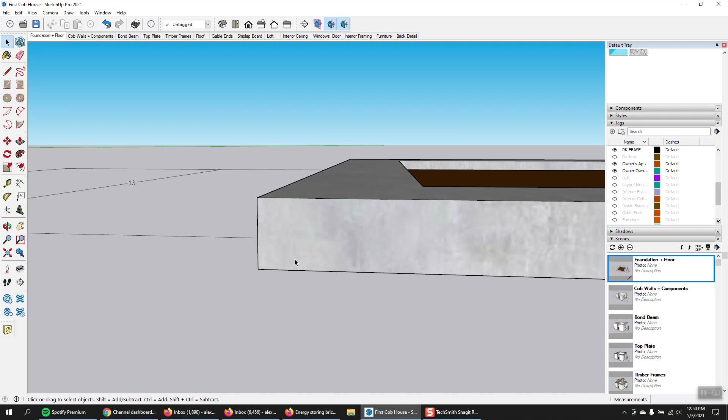So you'll see the foundation here, we're not actually going to be going beneath grade in this particular video. The below grade foundation has not been designed yet. It will be included later. So everything here is above ground.

And you'll see also the floors in here. The floor actually would be installed much later in the process. But basically the first thing is we want to put in the foundation, and then from there we go up and we build our cob walls.

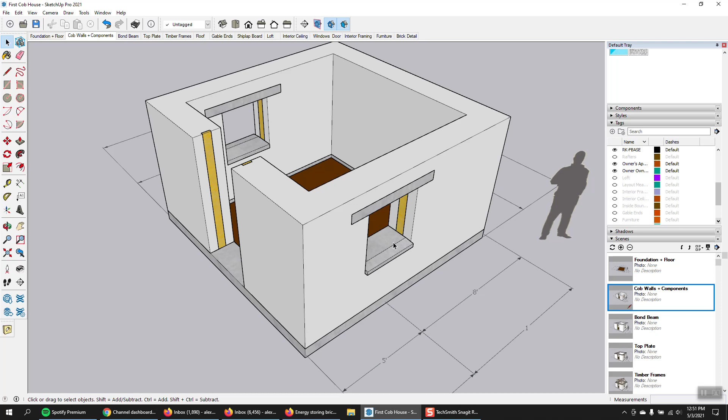So our cob walls here are 18 inches thick, and we have all of our window and door components, most importantly the sills and the lintels, and then we have the framing in here to attach our finished windows into. And I'll be making a video more on this framing later.

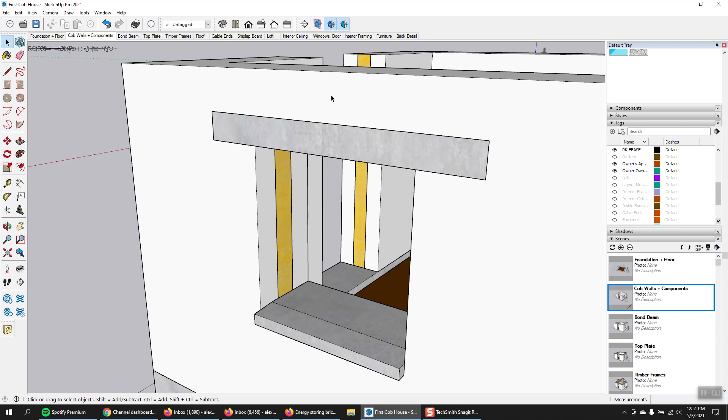Now the lintel, as you know, is a component that distributes the weight of the wall that's above this gap opening. And according to code, you would have the lintel extend a foot past the edge of the opening. So it's a foot over here and a foot over here.

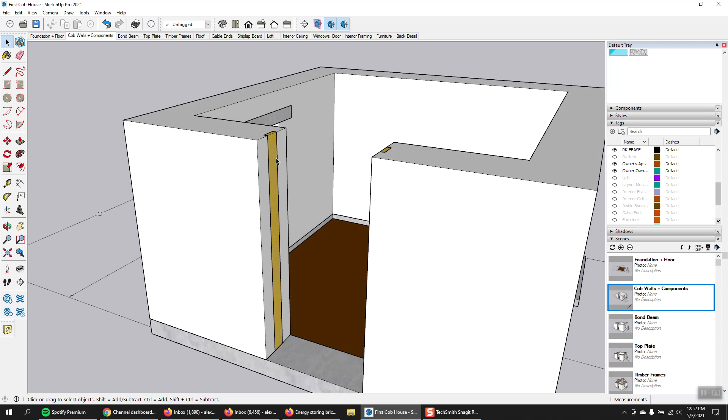And that is the same for doors, except in this case, we don't have a lintel above this door because our bond beam is going to go right up here.

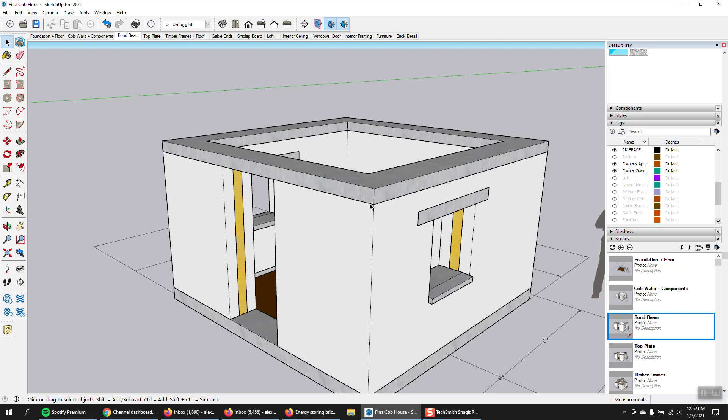So here we have the bond beam, which extends all the way around the top of the walls. And this bond beam actually replaces the need for a lintel in this particular case because these cob walls are only so high. Now from the bond beam, we want to attach what's called a top plate.

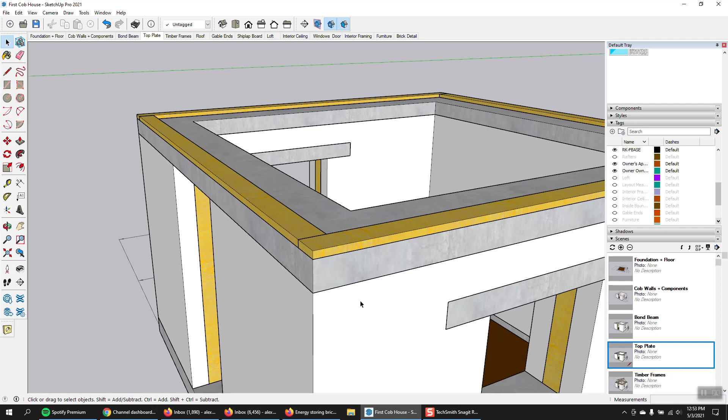And the top plate is bolted into the concrete of the bond beam, and I haven't shown the bolts here yet in the design, but you'll have J-bolts sticking up out of the concrete, and then a little washer and nut which tightens down and clamps this piece of lumber onto the bond beam. Now the important thing about the top plate is this is what's used to attach your roof to your walls.

So actually in this particular case I have some timber frames set up before we install the rafters. Now in this case these timber frames are more for sort of a decorative aesthetic purpose. The only real function they hold in this design is they hold up the roof ridge beam. Now, you don't need to do it this way though. So don't think you have to do it like this, at least.

I'm not going to get into all the roofing details here, but let's go ahead and add all the roof pieces, and I'll try to break it down a little bit for you.

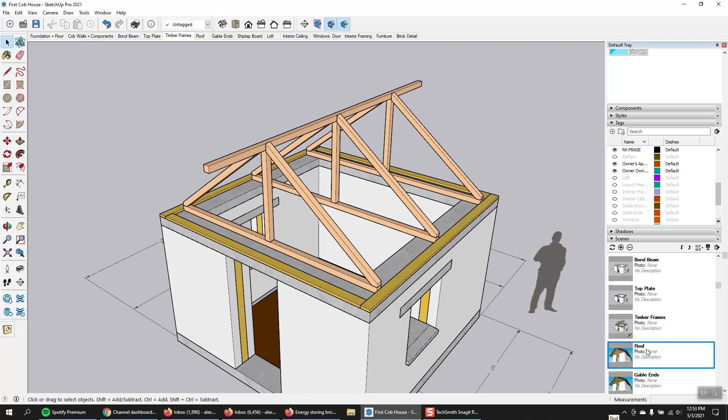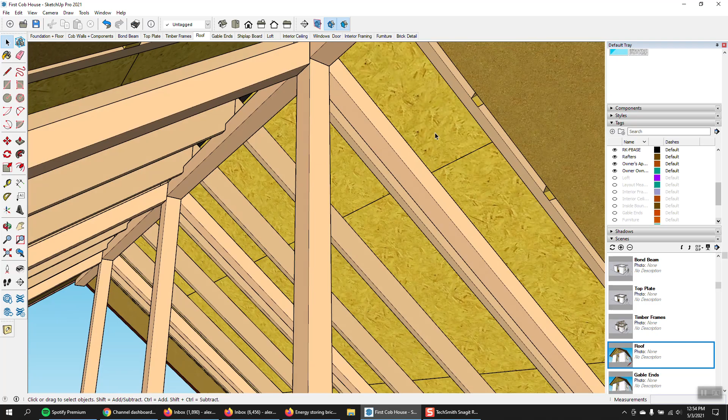So now we have the roof on, and as you'll see, we have the rafters, which are these, I think they're 2x8s or 2x6s, and they attach up at the peak and rest on top of that ridge beam. Okay, and then on top of the rafters we have this OSB plywood here, and then there's some roofing felt on top of that, etc.

I'm not going to go into all those details here, but basically it's the rafters, the OSB, the roofing felt, and then the finished roof tiles here.

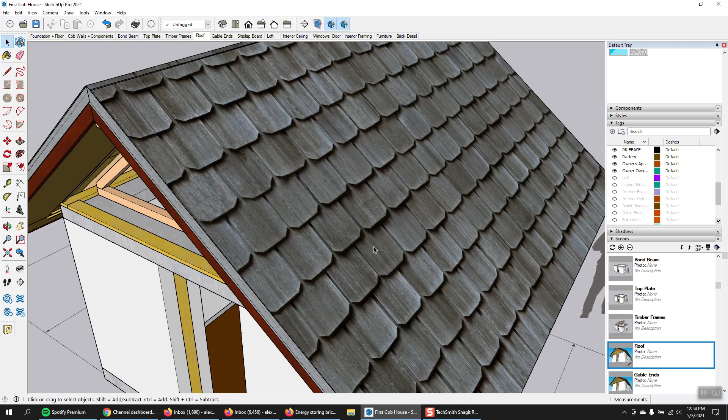And you'll also see I have this nice drip line all along the edges here, and some roofing details. And then the soffits.

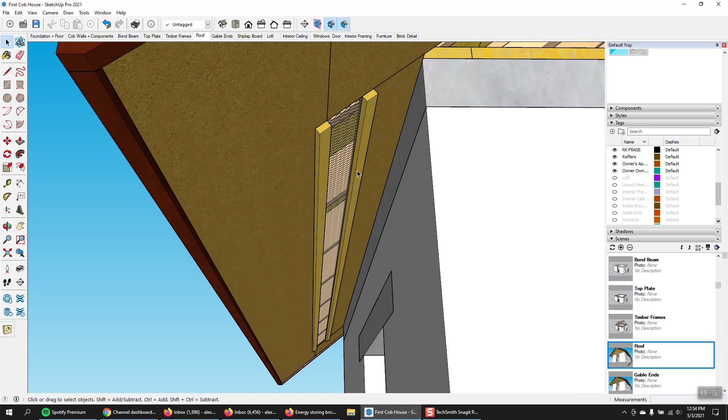The soffits are actually quite important, and I'll show you what those do. The soffit lets the air flow up through the roof, between the rafters up to the peak, and then out the top. There's actually a gap at the top here, and it's able to flow out.

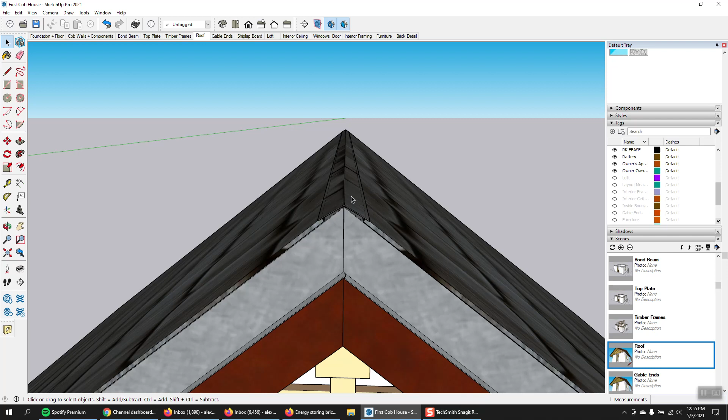Moving on here, we have the gable ends. We just plug up these ends here with some wood.

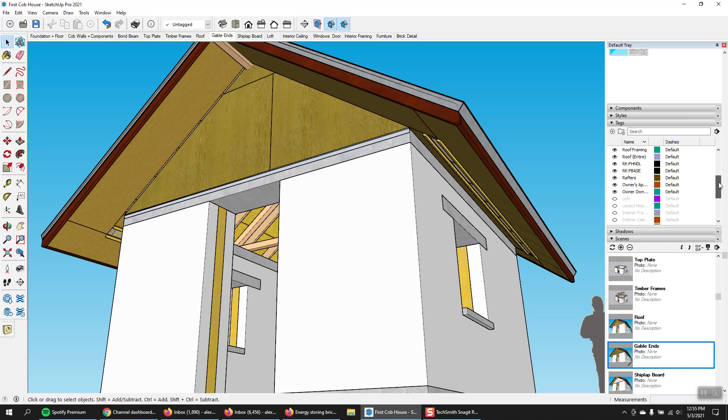Let's see if I can give you a better view here. All right, so we've basically just plugged up the ends by framing it out and putting plywood in between to cover it all up.

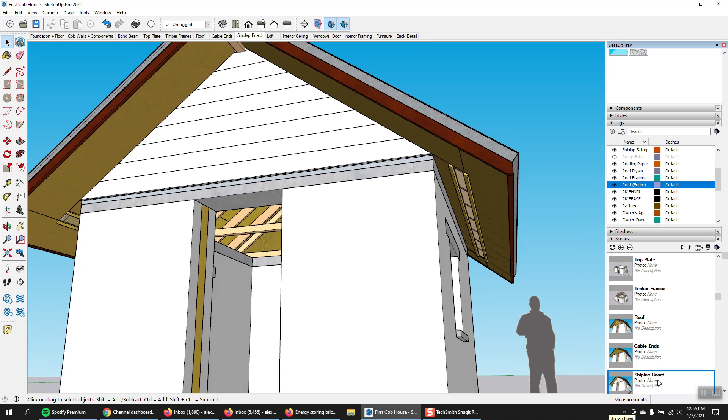All right, put some more detail, some shiplap on the exterior.

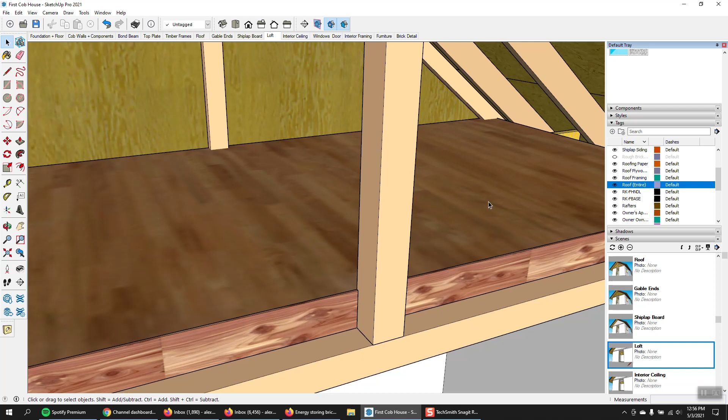Now we install a loft on the inside. This is just framed out, pretty simple actually. This is space for sleeping and increases the square footage of the interior usable space.

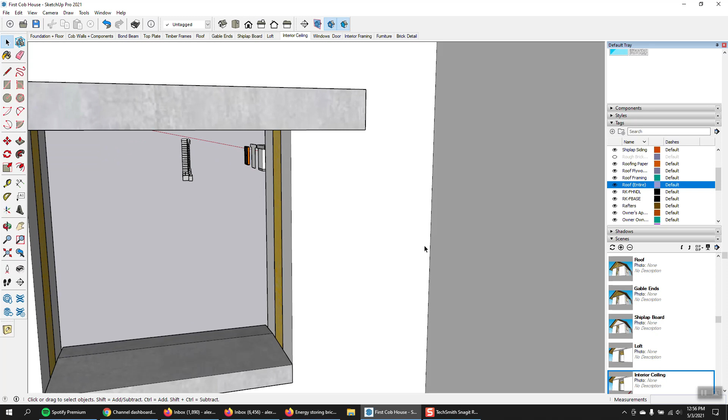Now the interior ceiling. Do all the finish work on the inside so it looks clean and nice. This is a plastered ceiling, and I've plastered the inside gable ends as well.

Now the next step is to install the windows and door. So I've got 2 windows, 1 door, and again these finished windows attach into those framings, which are embedded in the cob wall.

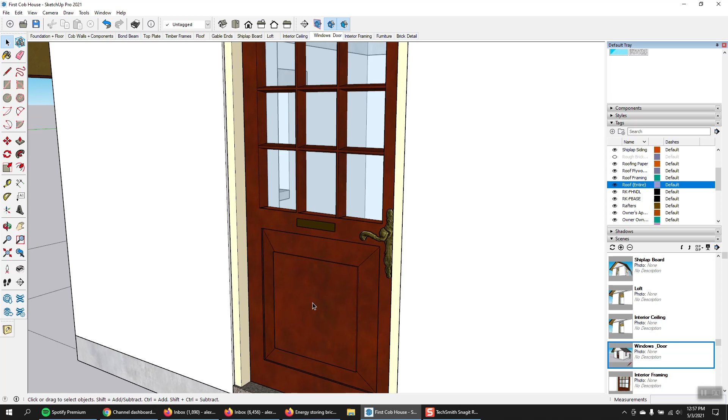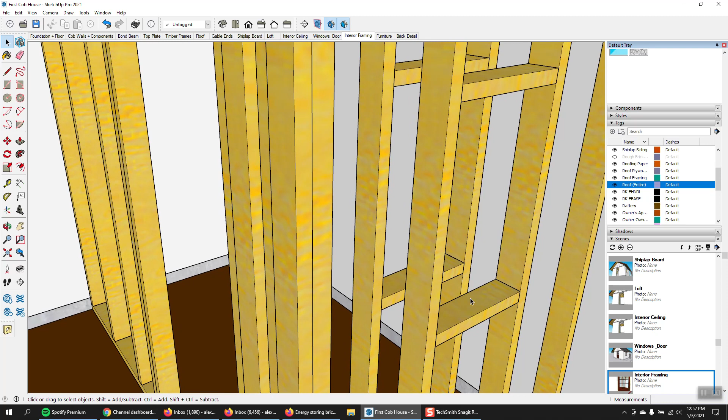Next step here is to install the interior framing. We have a couple little interior walls here separating the main room from the bathroom, and over here is a little utility opening which will be installed so we can get to electrical or plumbing that might be installed through this particular wall here.

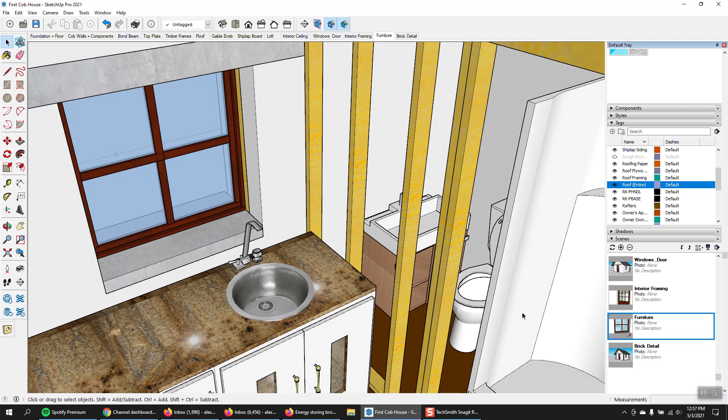And let's see, now if we add some furniture, you can kind of see the space and its functionality. So we have the kitchen here, little mini kitchen, got the bathroom in here, we actually have a shower, toilet and sink in there.

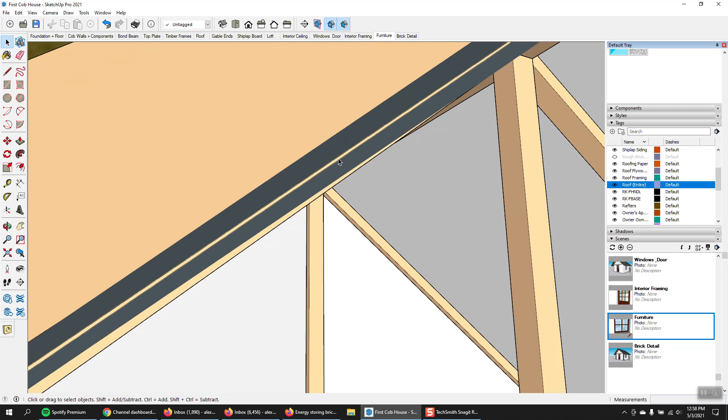And over here we have a little washer dryer. So there's enough room left. You could put your desk here to do your work and your bed up here in the loft. And that's basically the necessities.

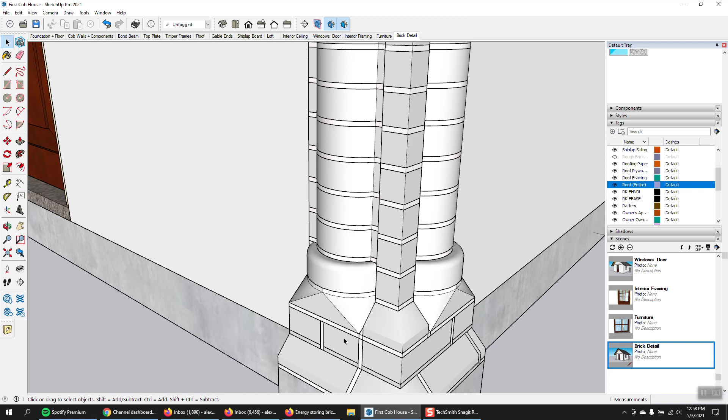So finishing up here, I've put some brick detailing on the exterior, and these are bricks that I make. They're architectural bricks, and you can do nice architectural brickwork with that for some aesthetic appeal. So I've put one of these columns on each corner.

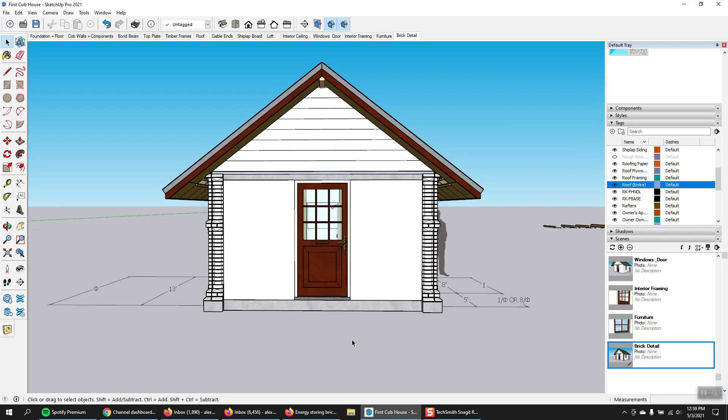And so that's that. That is a tiny cob house designed according to Fibonacci numbers, has nice proportions, it's functional, it's low cost, and it's going to be a great dwelling place.

Again, this is a tiny cob house that I'll be building as the first structure on my piece of property and using it as a living space for probably a year or so as I develop and build a larger structure.